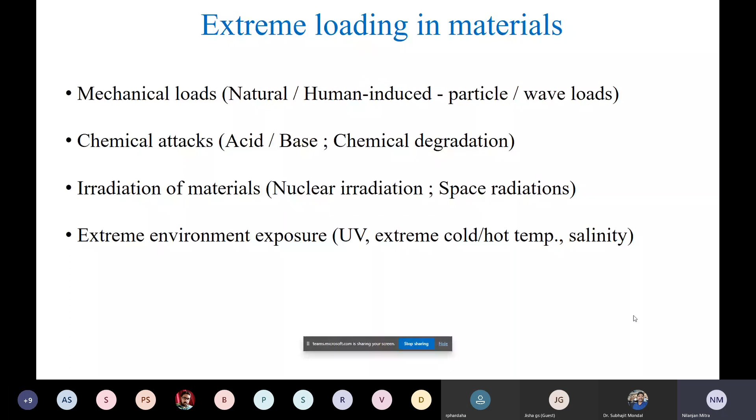What I will go over here is all the different types of loadings I've talked about: what they are and how they can be mitigated. Most of my talk will be around the research that I have performed. Obviously, others have worked on the same topic, but I will focus on what I have performed within this perspective of materials at extremes.

Many of you are aware of this cyclone Amphan. It caused huge amount of damage, not only in Kolkata, but in places like Sundarban and others. One of the main intents of a civil engineer should be to protect these structures against such natural damages. How to do it? One of the ways is to modify the material, make it much more resistant and resilient, such that you can develop these kinds of things.

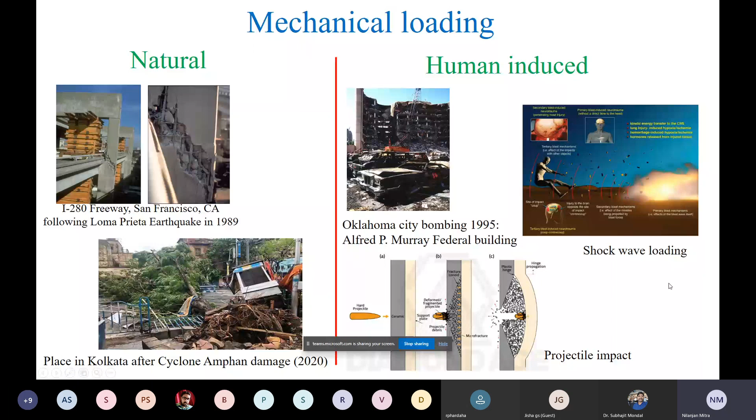So you see how a numerical model is developed and then validated with an experiment. After this validation process, it is then put forward into existing software such that you can model huge buildings and so on and so forth.

By the way, this work is present as an open source type of code. If anyone is interested, you can take a look at that. There is a website by the name of OpenSees, primarily maintained by Berkeley. I was associated with that when I developed a part of this code. But apart from this, there are many other things as well.

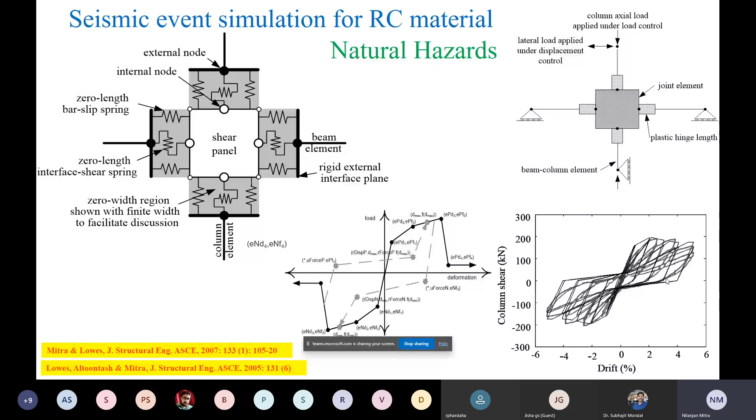Now, talking about man-made type of hazards, one of those hazards is basically the blast wave. Think about how to develop a material such that it will not undergo degradation due to this blast wave.

For that, this is what we took up at IISc. IISc has a big facility for shock tube simulations. So what we did is take different types of materials - normal concrete type materials, and concrete materials with fiber reinforcements and various other modifications.

If you impose 60 bar of pressure on a small cube, like a 100-millimeter cube, you understand what impact it will have. So we took a normal type of concrete material and a modified type of concrete material, and observed the different types of degradation. From there we can suggest that this material performs better compared to conventional concrete materials.

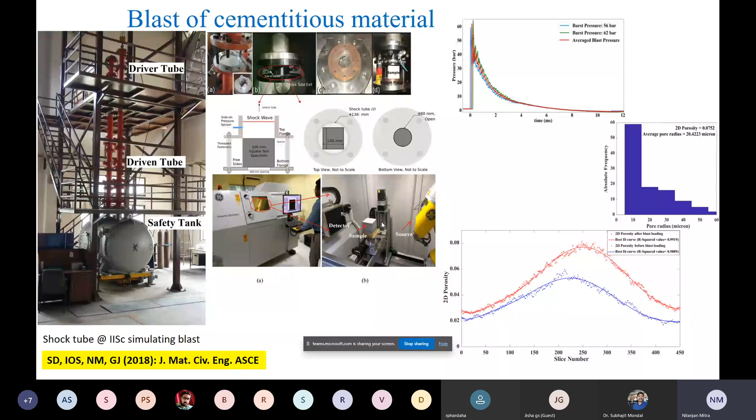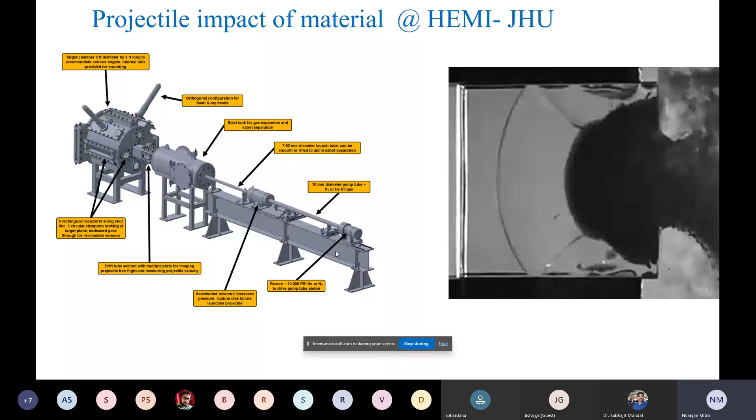Now for the case of projectile impact, here's how things are done. This is actually a picture from the institute where I'm currently at, Johns Hopkins. What you see is a big facility, something in a combination of a shock tube and a gas gun. Why a combination? Because a shock tube just produces a shock, and a gas gun just has a projectile. In this case, it's a combination of both.

In the picture or movie on the right, you see a projectile which enters a target, and as it enters, some waves are getting generated. How the waves are generated, what fragments are created out of it - those things form a part of my research, and not only mine, there are many other persons around the world who do this kind of research.

So in a nutshell, what we are trying to do is break things in order to understand how to make them much better. That's how I would say it.

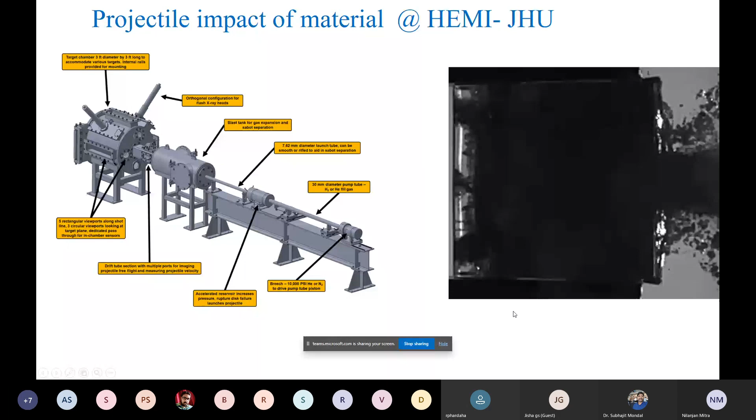Okay, now I think with this, I hope you understood that we need to really work with materials, modifying them to improve their properties, such that they are resistant to different types of conditions which are not part of daily life - I mean these are extreme conditions.

Before we start, I should say, yes, I do perform some kind of experiments, but primarily I'm a computational guy.

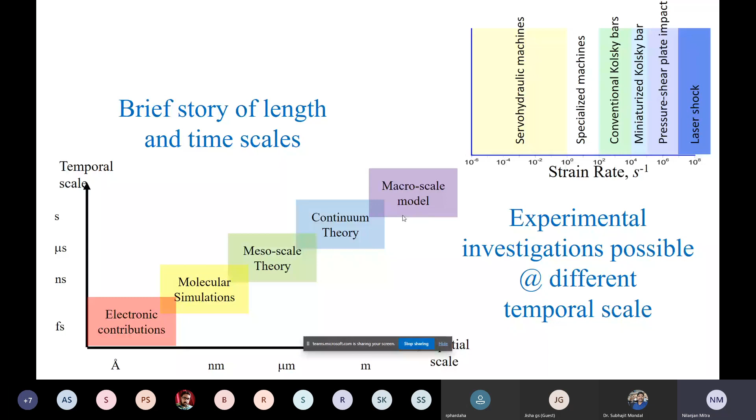So this is just to give you a brief background about what the different length and time scales mean, and what are the different types of experimental investigations that are possible in those different temporal scales.

Now, what we were doing is that if you subject this molecule to some kind of shock loading, then obviously the molecule will degrade after some time, right? So we were trying to find out the point where this molecule will degrade. Eventually, it does degrade. And how does it degrade? Is it the carbon chains which break? Is it the methine chlorine which breaks? So that is what we are trying to figure out.

Now you can say, how does it really matter? Yes, it does matter. Because if you can understand which of the parts will degrade first, you can reinforce that part. If you can reinforce that part, you can make a better material based upon PVC, a slight modification of the PVC, such that when you apply a certain amount of shock loading, the molecule will not undergo degradation. So that is what is important.

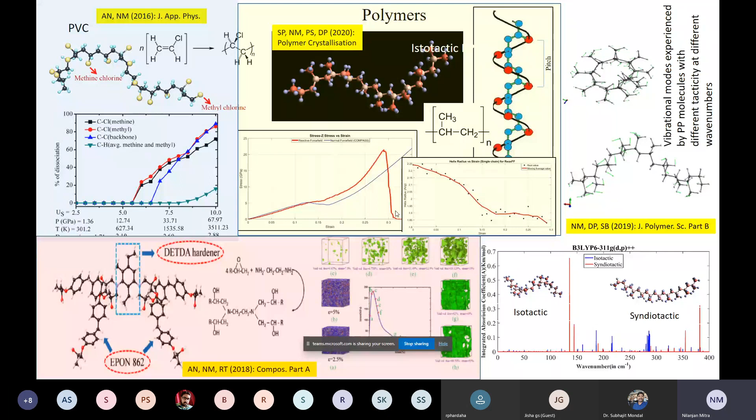Now, apart from polymers, think about something called minerals. Almost all of you, as I understand, are from a civil engineering background, so you must know about different types of minerals, for example your cement constituents. When you have cement, it has different types of constituents in it, like C3A, tricalcium aluminate, C3S, tricalcium silicate, and so on, right? Also gypsum, and there are many of them.

Now, all of these are basically minerals. And as a matter of fact, all of these minerals are naturally available. At some places, you will find those minerals. And these minerals have very interesting characteristics. As you can see, same as the previous slide, I broke up this slide into 3 different parts.

You will see one part at the left-hand side, which is colored yellow. That material is called tricalcium aluminate, C3A, one important constituent of your cement particles. What you're looking at in the top part is how the molecular structure of the C3A is arranged.

Yes, anyone has a question here? I think I heard something. So there is one comment asking you to hide the sharing bar that is showing on your screen. I have to do what? Hide. Repeat again, please. On your screen, yeah. Okay. So can you see now? I just clicked hide. I think so. Yeah, now it's fine. And is there any question? No. So please continue.

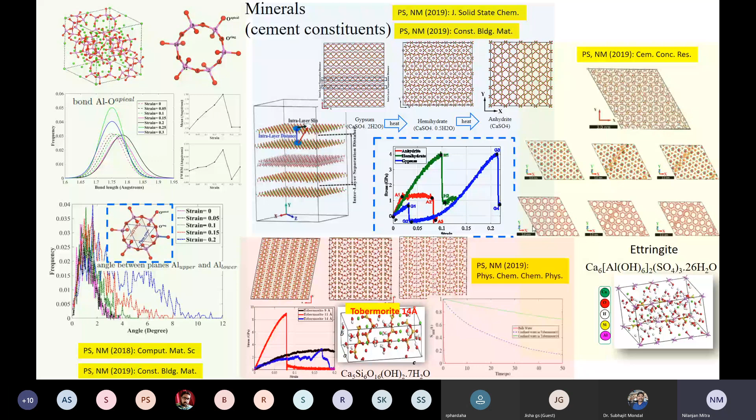Okay, let's move on. Water. I think everyone has seen water. It is also named the elixir of life. But water has very interesting properties. Actually, water is something which keeps us all living. Any planet that we are probing out in space, the first thing we check is whether that planet, star, or whatever it is, has water.

If it has water, then the next question is, is there life? Please remember that. If there is no water, then obviously there is no life. So water does play an important role. It's a very common material. Everyone has seen water, and everybody thinks they understand water in detail, but it's not really true.

Think of it like this. Water has an interesting property at 4 degrees centigrade. And due to that property, when water freezes, it does not freeze from the bottom up. You will see the water has frozen at the top, but inside a pond or a river, the water is still there.

So that means the fishes which are present within it, they're still living. So how is that possible? That's the beauty of water. Another interesting property I will tell you about water.

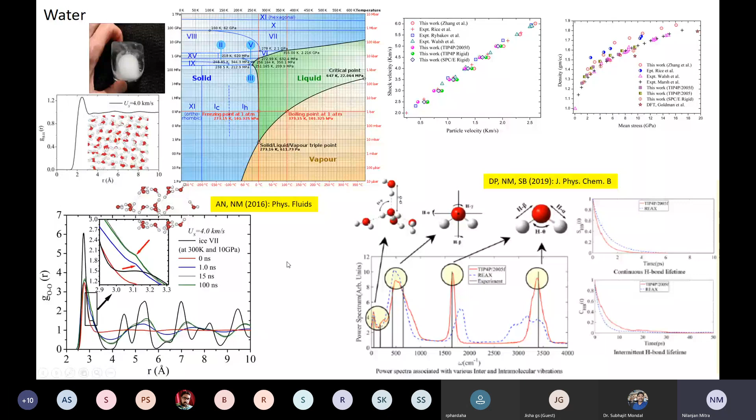So far I've talked about many different things. I've talked about polymers, which are a class of materials exhibiting different types of behavior, usually showing a chain type of structure. Then I've talked about minerals. Most minerals are something like ceramic structures, meaning they have a combination of ionic bonding as well as covalent bonding.

After that, I've talked about water, which is a very common material out there. So those are all complex materials, I should say. If you talk about metals, they're not that complex with regards to molecular structure, because metals do not have a number of different elements within them.

In this case, we are just probing copper. Copper is a very commonly utilized material for shock type simulations or shock type experiments. People always use copper for these kinds of things because copper has certain characteristics.

These are basically metallic structures. In these metallic structures, when you subject them to shock loading, you'll eventually see a lot of different patterns getting formed. These patterns eventually result in some kind of slip along those planes.

You see the small dotted lines, those are basically called dislocation lines. These dislocations eventually give rise to your slip. And this slip eventually accounts for something you might know later on, called plasticity in materials.

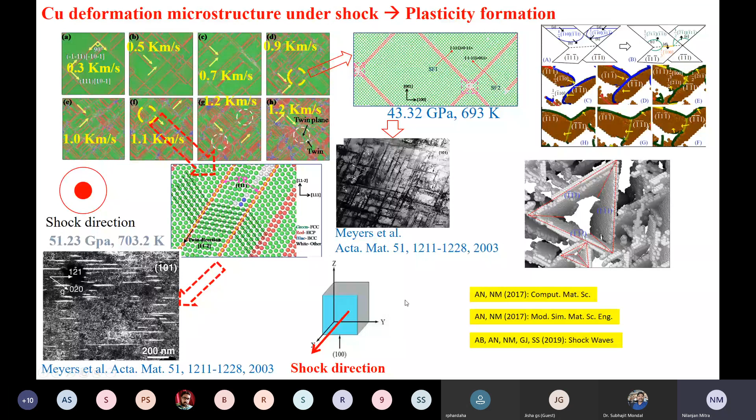Copper not only undergoes plasticity, but also phase transformation. When we talked about examples for phase transformation, we were only talking about moving from solid to liquid stage. But it doesn't always have to mean moving from solid to liquid or liquid to gas. It can also mean the crystal structure moves, and there is a solid to solid phase transformation, from one solid crystal structure to another solid crystal structure.

In this case, what is happening is you have copper, which is basically FCC, face-centered cubic, and under a certain amount of stress or loading conditions, it eventually transforms into something like body-centered tetragonal, or BCT. So we were probing as to how it moves from the FCC stage to the BCT stage.

Now, when you do those kinds of things, you have to do something called X-ray diffraction. XRD is a very common methodology. We've done it numerically, but you can also do it experimentally, and we have validated our work with experimental investigations. When you do XRD, you probe the different types of planes along which light will reflect back. Based on those, you can find out the material exists in this particular orientation, or has a particular space group.

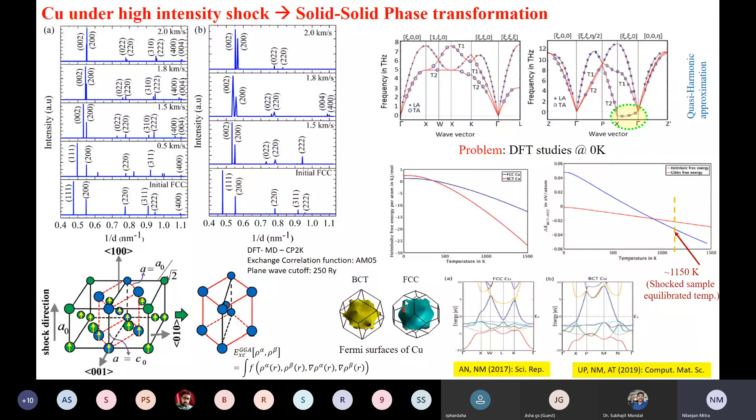If you have any material, it will have some kind of defects - that's a nature for any material. Defects can be of many different types. One of the easiest ways of accounting for defect is putting in voids in the material. You can have connected voids, disconnected voids, and so on. So if you put in a series of voids and subject it to shock loading, what are the different types of things you observe?

As you can see, there are red regions - these are hot zones, where the temperature goes significantly higher. If you can tailor the material by putting in voids and improve its properties, that's a nice thing to do. So we've shown here that putting in a void will change certain shock characteristics. We've done it from the point of view of shock, but it can be done otherwise too. Nowadays, people are putting in simulated voids to change material characteristics, meaning the plasticity behavior of the material, for example. So those things are possible.

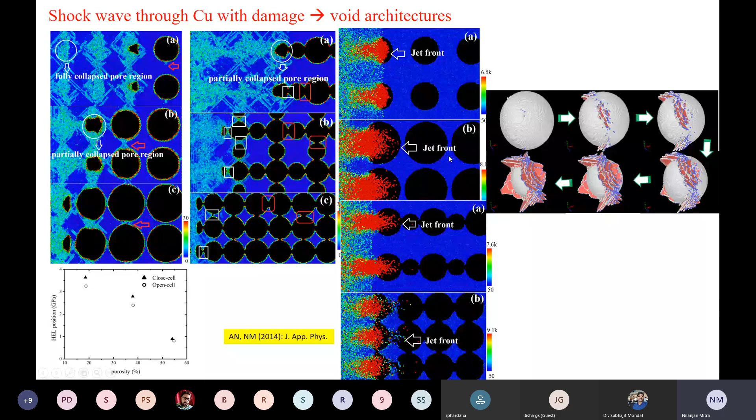When we talk about metals, there are different types, or classes, of metals. One of them is copper, which has a face-centered cubic structure. And then there are other types of metals called HCP - HCP structures are also available.

Hexagonal close packed, it is referred to as. So this hexagonal close packed, if you look into the periodic table, I believe all of you have at least at one point of time looked into the periodic table.

And the periodic table presents very interesting things. Even though I'm a civil engineer, if you're interested in structures or other disciplines like environment or geotech, you also have to think about the chemistry associated with it. So my work has been trying to imbibe chemistry and physics within the concept of engineering. That's what research is all about, I think.

Anyway, if you look into the periodic table, you will see different types of elements, and different elements will have different types of crystal structures. If you look at titanium, you will see that it has something called an HCP structure. HCP means hexagonal close packed.

This HCP structure is kind of interesting, because it does not really give you dislocations, which are essential for formation of plasticity. What HCP structure gives you is something called twins. So twinning is prevalent in HCP type materials.

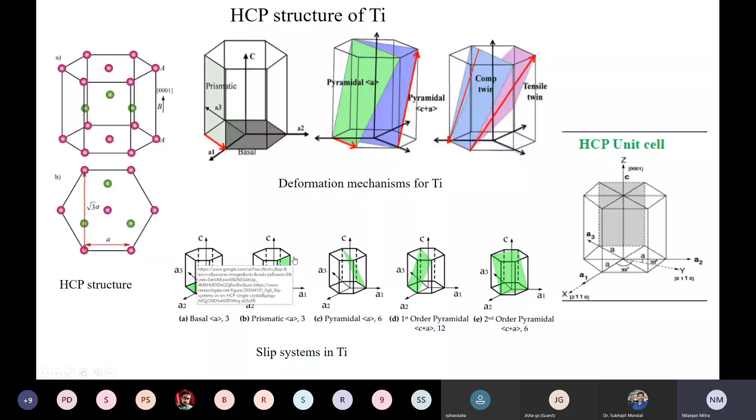So if you subject it to different types of loading conditions, we did compression loading, tensile loading, and so on, you can activate different types of twinning mechanisms. The point of discussing these twinning mechanisms is basically looking into the theory behind plasticity. How do those plasticity mechanisms really evolve, and in which planar directions does plasticity move?

Plasticity eventually means the flow of the material, and the direction it will move is given by your twinnings. As you can see here, if you apply compression loading, you get compressive twins; with tensile loading, you get tensile twins, and many different types of results can come out of these.

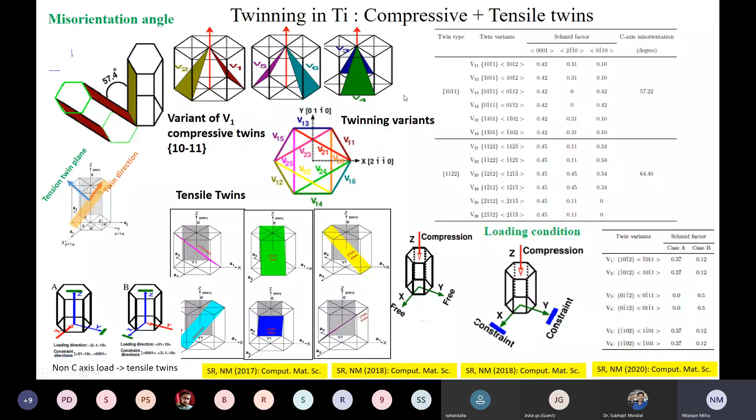Now, just to refresh some of your memory, maybe some of you have seen this. When you talk about bonding in materials, remember we've talked about metals, minerals, and polymers. In all of them, at the end of the day, there is some kind of bonding between the atoms. So when you look into bonding, there are different types available.

You must have read about this back in your class 10 or 12. So you have something called ionic bonding. What does ionic bonding do? It basically takes a valence electron and gives it from one atom to another—the Na atom gives it to the Cl atom, and that's how both of them become stable. So this ionic bonding is quite strong in that regard.

If you think of metallic bonding, it is something like metal ions distributed in a sea of electrons. Everyone shares, and everyone is kind of floating within it. So that's your metallic bonding.

If you look into covalent bonding, it does not give off electrons from one shell to another—they mutually share the electrons. That's what covalent bonding is. An example of that type of material is silicon carbide. An example of ionic bonding is sodium chloride. For metallic bonding, I talked about copper and titanium—those are your metallic bonds.

Apart from that, remember, any material you have will not be purely covalent or purely ionic—it's usually a combination of the two. That's how you must have read about something called Pauling's expression, which gives you the bond ionicity fraction. These things are important to understand, because you're eventually dealing with the material at the molecular or electronic level, and you need to understand when this bond kind of changes.

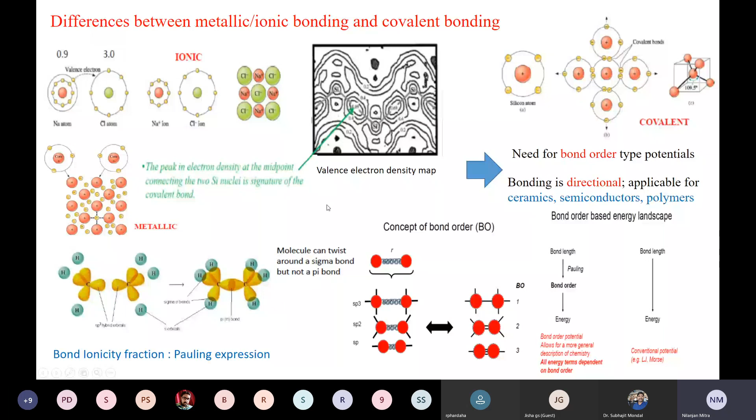So you need to at least understand the different types of bonds present within a material. Now, I've talked about different types of metals - copper, titanium, and so on - but not all materials are metals. Take silicon, for example. Silicon is a very common material used in the semiconductor industry. Any computational device, mobile phone, or electronic item you have contains silicon. Silicon actually forms the basis for the entire electronic industry.

That's why you might have heard of Silicon Valley, which is somewhere in California. Why the name Silicon Valley? Because silicon plays a big role - without silicon, you don't have an electronic material. So you need to understand how silicon behaves under different types of conditions.

Remember, all of these are solids. But even though it's a solid, each structure - like cubic diamond versus orthorhombic, different crystal structures - has different properties. So for any crystal structure, even within the solid form, forget about changing from solid to liquid, the property of that material will change. That's a basic thing for any material.

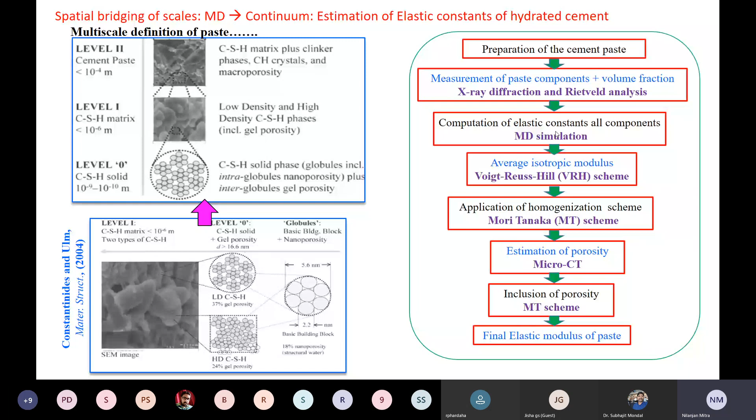What I showed you, C3A, that is basically aluminate. And gypsum I also showed you. I also showed you ettringite, tobermorite, and so on. You see the different types of structures in there. So these are what is present within the powdered cement. As you put in water, eventually you get different types of compounds. And after 28 days, in what we know as hydrated cement paste, we get different compositions. These are different weight percentages.

So we take all these weight percentages and put them in our chart. Then we compute the elastic constants for all of these individual things, and eventually we come up with a value of your elastic constant of something like 30.3 gigapascals. And if you do an ultrasonic test, which is an experimental investigation to find the elastic modulus of any material for that matter, you get something like 28 GPa. So I think we can safely say that the methodology we are prescribing matches quite well with what you obtain from the experiment.

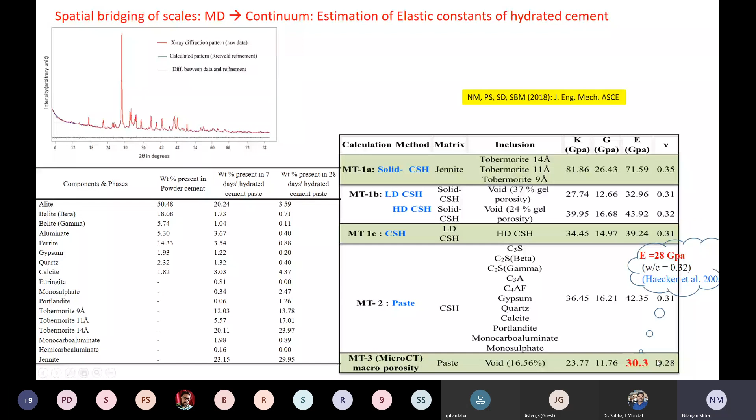Okay, now, as you might have noted, when we talk about these extreme loading conditions, many of these materials are of interest either for defense or for space. I primarily work with the defense region. Space, I have worked once, and I will be working in the future, I believe. But most of them are basically defense types of applications. So there are a lot of different applications.

Some things are copyrighted information, so I cannot show that to you. For example, I also work with different types of explosive materials like RDX, TNT, and so on and so forth. But those things I will not be discussing here. Those are of relevance to any country, right? So obviously that is not an open discussion. So I'll be talking about some materials of interest to defense, which are at least also of interest to any civilian for that matter.

One of those materials is basically a sandwich composite material. We do have a lab setup in which we can manufacture sandwich composites and different types of sandwich composites for that matter. The project that I highlighted in blue was basically funded by the Navy. The Navy was interested in these types of materials which have a PVC foam and glass fiber and epoxy resin. But there can also be other different types of materials which we can do.

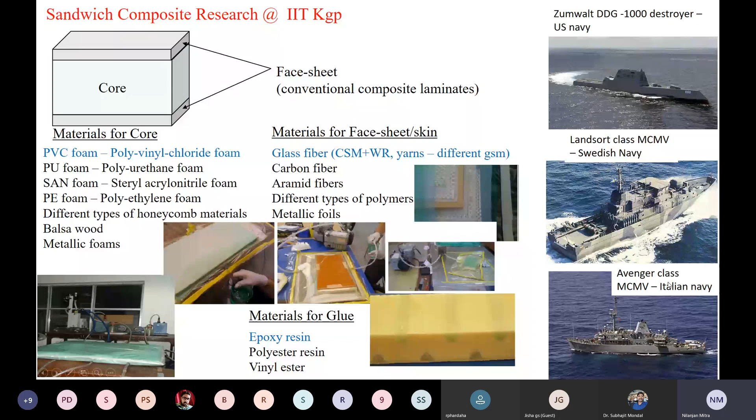So one of the major problems whenever we are talking about sandwich composites is delamination. There are two different materials in there, right? One of them is the face sheet, typically a glass fiber type of material, and the other is a PVC or foam type of material. They have distinctive characteristics, and they are glued together by something like an epoxy resin. So obviously the weak point of the material is the interface region, and that interface region is prone to cracking and delaminating.

So that's quite a common thing. So we devised some methodologies by which we can prevent this delamination. One of them is called a shear key. It is like ridges that you place within the foam, such that even if there is a crack which you initiate, that crack path will get deviated, right? So that's an application of a shear key.

And then also we can do something with carbon nanotubes. If you put carbon nanotubes, then those carbon nanotubes form some kind of chains, and that prevents the crack from forming. So these are two different methodologies, at least what we have worked on. There are obviously other methodologies, one of them being stitching. We have not worked on that. So by these two methodologies, we can prevent delamination.

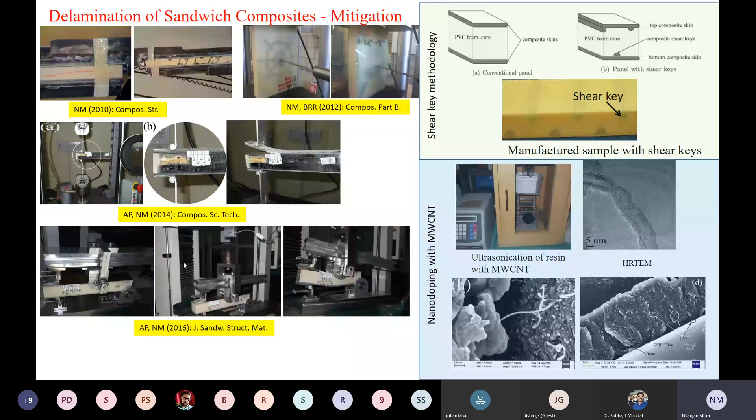And we have done numerous different tests with various different things. We have performed mode 1 type of simulation, mode 1 type of experimental investigation, mixed mode type of simulations in which you can have a fracture propagating under both normal and shear loading, and so on and so forth.

Capturing the delamination is also very interesting, because usually you cannot see the delamination from the face of it, because it is happening inside the material body. So capturing delamination is a very troublesome matter. So what we did in that case is that we put in different types of optical fibers. The diameter of the optical fibers is very small, so these are very small things that you're embedding within it.

And then you're passing light, and as you're applying load to it, there's a change in the frequency of the light that is being transmitted. And with the change in light frequency, you can find out what is the strain that is being developed in the material. So that's what we are doing here.

We developed two different types of methodologies, and actually this was a project funded by the space agency ISRO. This one was primarily meant for sandwich composites for rockets and other things. So how would you find out in situ, while the rocket is going up, for example, whether there is some region which is weak, or there is some kind of delamination?

So for that, we put in these optical fibers, and then we can do real-time monitoring of what is really happening at the interface level between your glass fiber and your PVC, for example.

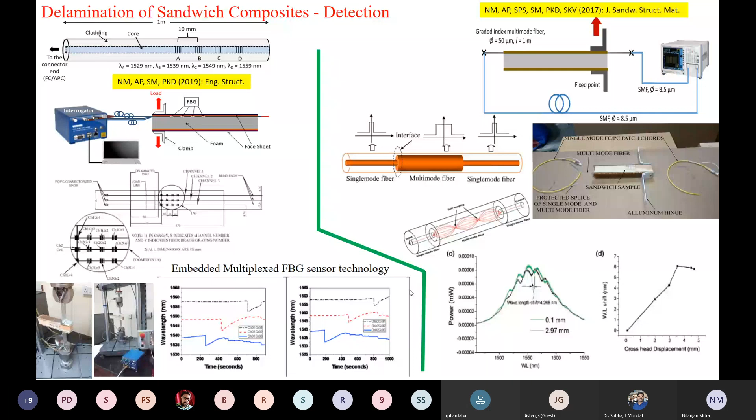Okay. We also carried out some underwater explosion tests. This is at a facility at Visakhapatnam, NSTL, the Naval Science and Technology Laboratory in Visakhapatnam. So we teamed up with them. We made these big sandwich panels, glass fiber and PVC foam. And then we put it underwater, because our application was basically, as I said, Navy, submarine, those kinds of applications.

What we found out is that this material performs much better than steel. Steel is, first of all, much heavier. If the material is heavy in itself, it is not lightweight, and it cannot carry as many passengers, for example, or other equipment, right? So a material which is lightweight is good for the Navy. That is why this material is utilized by the Navy nowadays for naval applications, at least. Okay.

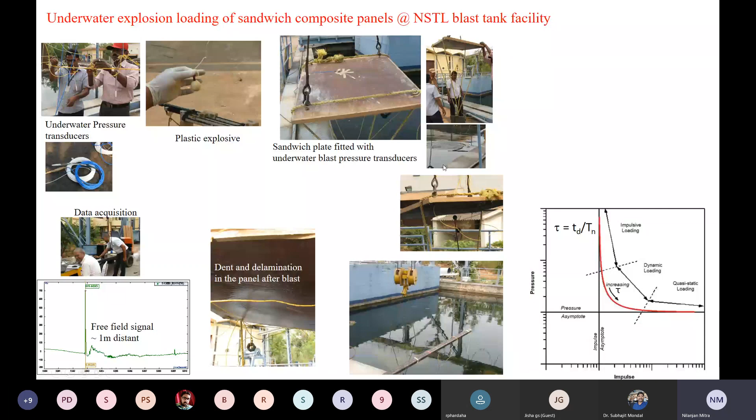Now, I mentioned previously, all of those cases that I've described so far are primarily related to mechanical types of situations, meaning that we apply some kind of mechanical loading, whether it be a projectile impact, a blast or a shockwave type of situation, or some kind of natural hazard like an earthquake and so on. And what happens to the material? How can you change the material and so on? But

extreme conditions, when I'm talking about extreme, it is not always only the loading component of it. Your material may be subjected to some extreme weather conditions, an extreme environment. Think about a ship. You might have seen a beautiful view of ships that are nice and clear, but there are different types of sea states. Maybe after this you can type in something called sea state 5 on YouTube, and you can see what that condition means. You'll understand that there are different types of sea states to which your marine structures are subjected.

So obviously, when you're putting up a ship, it has to withstand different types of marine conditions, and one of the extreme conditions is sea state 5. If you look into it, you will see the amount of waves and so on. Apart from that, these ships also operate under extreme conditions. For example, if you have a ship stationed in Alaska for 2 or 3 months, the temperature in Alaska is usually around -20 degrees centigrade almost all throughout the year, apart from 1 or 2 months in which it goes above 0.

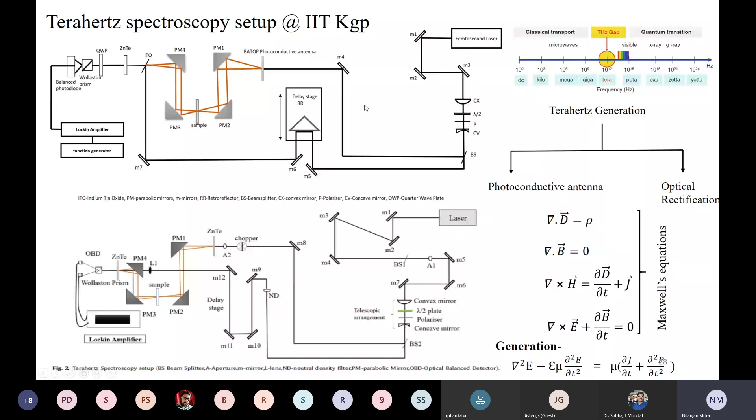By the way, we have a terahertz spectroscopy setup. I will not deal with that in detail, because we set it up ourselves. This is not something you get in the commercial market; you have to set it up yourself. So we have that, and there is obviously a lot of physics associated with it. We did it in collaboration with one of our physics department professors. I'll show you what I talked about earlier, IR spectroscopy and terahertz spectroscopy.

IR is something which probes the vibration of the bond. Like if you have a CH bond, you are probing the vibration of that bond. In the case of terahertz spectroscopy, you generally do not probe the vibration of the bond, you probe the vibration of the entire molecule. So there is a distinction between terahertz spectroscopy and IR spectroscopy.

We are doing something like a simulation at the electronic level in order to do these simulations. And when you're doing the experiments, you are basically doing terahertz spectroscopy.

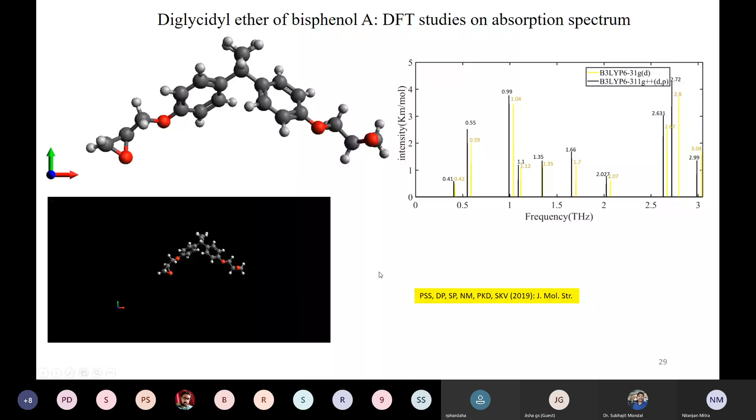I have talked about many different things, primarily for the material, not much for the structure, apart from the fact that once I described the beam column joint.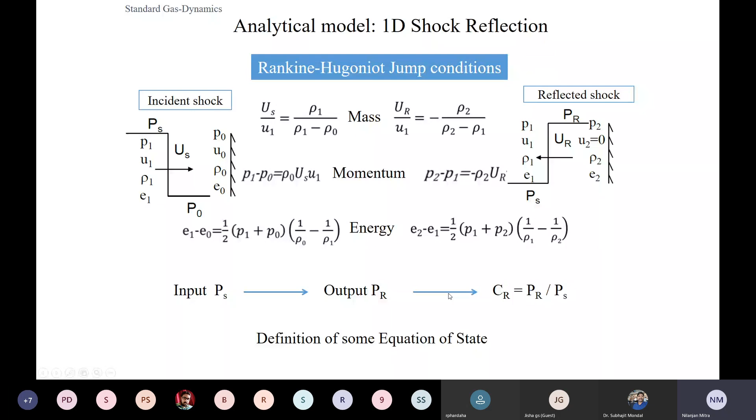The interesting thing is, the question we were probing here is, forget about the equations as I said. There are a lot of equations, and if you're really interested in the topic, you can go to the equations and understand in much more detail. But the outline of it is something like this.

Let's say you have a shock wave passing through the air. You must have read about the ideal gas equation of state - from class 10 to 12 you'll remember PV is equal to nRT. That's the basic equation for an ideal gas. What it does is relate the pressure, the volume, and the temperature by some equation. So PV equals nRT - when you use that, you are relating the pressure, volume, and temperature.

Together, you bring the three things together - that's your equation of state. So what you're meaning by that is, you change the volume or you change the temperature, you get some different pressure. Either one of the two you change, you get the variation in the two different things. So that's a relationship you build along with that.

Now, you must also note this ideal gas equation of state is not something which is applicable under all conditions. Like, let's say if I'm talking about shock waves and other things, we talk about huge amounts of pressures and huge amounts of temperatures. In those cases, your ideal gas equation of state is not actually valid.

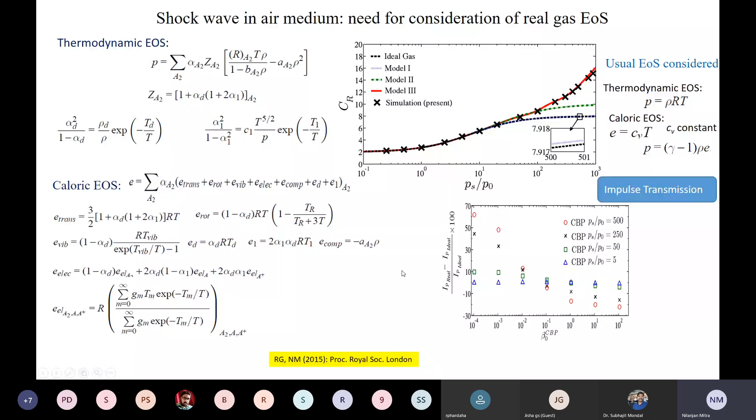We did it for the air, and also we did it for water, because water is the concern, at least in our naval area. In the case of water, it's much more complicated - you just do not have just a shock wave which is hitting the structure.

There are a lot of things, a lot of physics involved in an underwater explosion process compared to an air explosion process. Underwater explosion involves not only shock wave, but also cavitation bubble dynamics. We mainly concentrate on the shock wave part. Cavitation bubble dynamics is what we are doing with one of my previous students. We have proposed a work and are working towards cavitation bubble dynamics, but the work already completed is basically on shock waves, as to how the shock waves pass through air. Air we have already demonstrated. Water is what we're showing here.

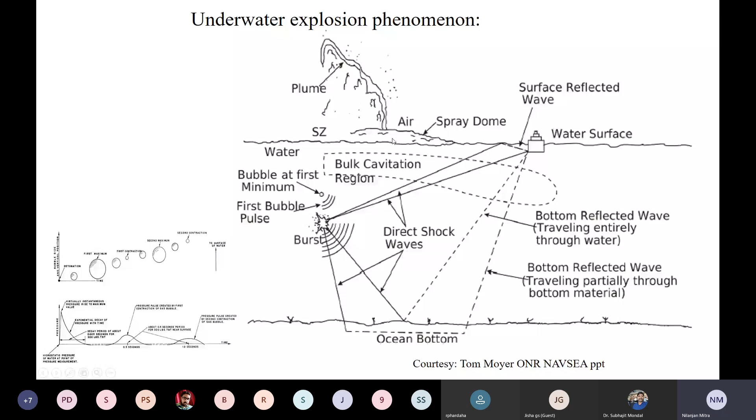Okay, so we have a lot of different things. As with air, we are showing how the CR value changes along with different pressures. We have also shown that if you have a rigid surface, how that surface is going to behave, or how there is a fluid structure interaction which happens. If you think of the water and the structure, which is basically something like a rigid structure, you can also think of that as a deformable structure, with different ways in that structure.

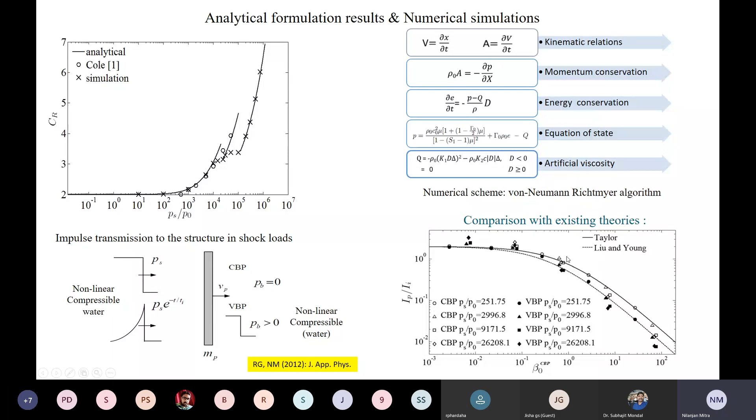As you might have seen, we talked about sandwich composite, because that is the type of material we use for our naval scenario. Those materials will have some kind of voids, and when you put pressure on them, those voids will compress, and that will influence the structure behavior. So that's what we were looking into. Along with that, we are bringing in this core compression model. The core will compress, and if it compresses, then what happens? That's what we are bringing in.

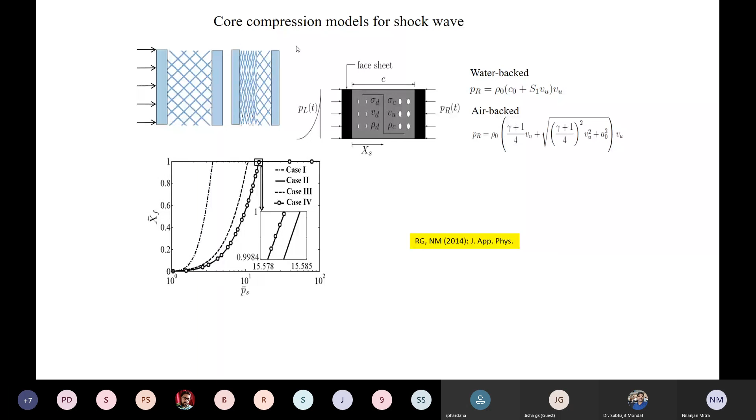The shock wave on the structure may not be entirely a normal shock wave. Normal shock wave means the incidence is at 90 degrees to the structure. It may not be like that; it may be at an inclined angle. So what happens if you have an inclined angle? We were doing this with different types of shock polars, also referred to as shock polars.

We were seeing how the shock polars change in the case of water. This is actually a new work from us; there is no prior work on shock polars in the underwater situation. There's a lot of work on shock polars in the air domain, but not underwater. In the air domain, they're interested because, for example, many defense planes exceed Mach 1, the speed of sound, and in those cases you get a sonic boom. People have done a lot of study on that, but underwater there is no study. So we were one of the first to do this kind of study for shock polars underwater.

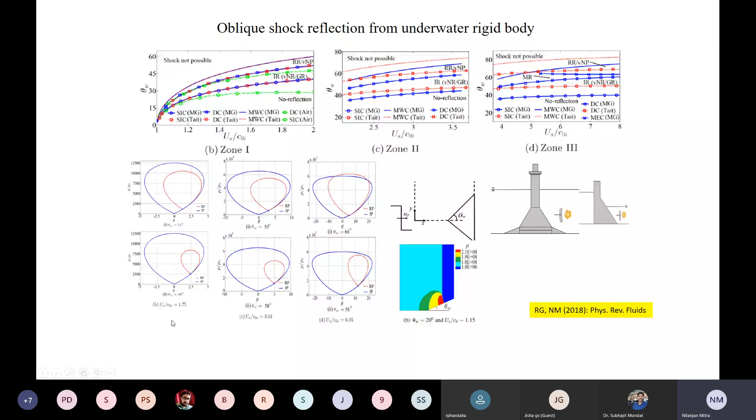I should nearly complete this now. All of these works you've seen are done by my students, mostly my PhD students, some of whom have already graduated and moved on in their lives. I have a few more PhD students at Kharagpur. All the agencies that funded this research are various agencies within India and also some in the USA. Right now I'm working with Office of Naval Research type work in the USA. So I do these kinds of things typically for materials at extremes.

Now, for a final slide, when you deal with shock waves and other things, it's a never-ending research domain. Shock waves have applications in many different areas. I was talking about aerospace and hypersonics, space vehicle entry or exit from the atmosphere, and planes moving at more than Mach 1 type speeds.

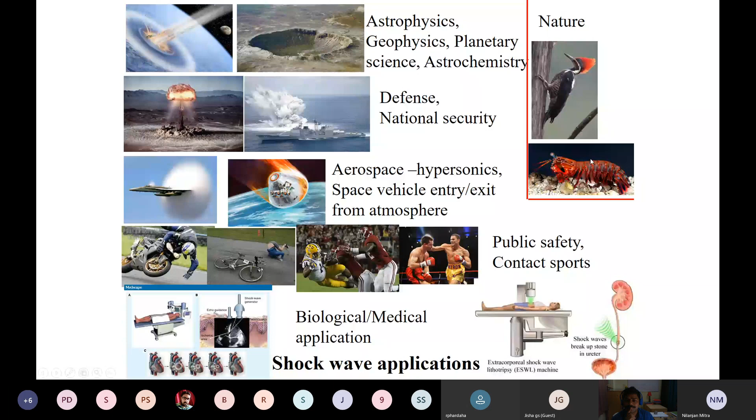There is also the mantis shrimp. The shrimp also is very interesting. It can give you a shock. I do not know if you have seen a mantis shrimp, or tried to put a hand in water which has a mantis shrimp and felt the shock of it. You will understand what I'm talking about. Search on the internet, YouTube, for mantis shrimp, and you will see what it means.

So I would like to end by saying that any problem that you look into, you have to understand what you're trying to probe. What is the question that you're trying to answer? I've shown you a very plain structure of a beam column joint. If I were to think about it from a continuum perspective and give an understanding to a design engineer of how he should build his structure, I'll be doing some kind of continuum simulations.

If I want to take a little bit deeper look and think about the material, then yes, I can propose some kind of material which will be resistant to these kinds of things, like maybe fiber reinforced concrete. If I want to think about which fiber is better compared to the other one, then I have to look at a much lower scale, at a molecular level. So it depends which problem you're trying to address. That's what is important.

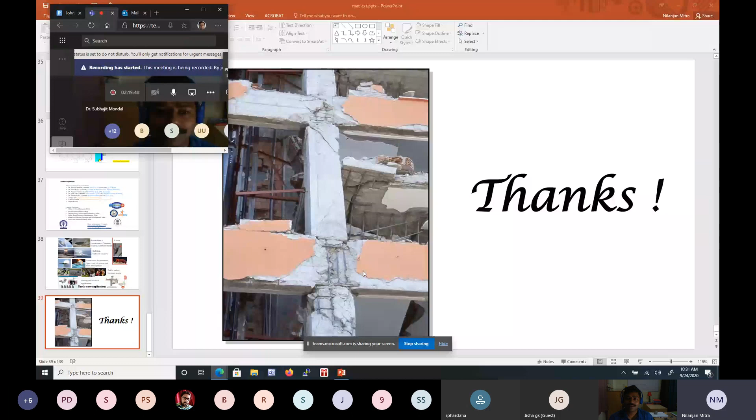Yes, I can see. The last question, from Jitu Panda: what is the relation between column and beam on the design side? It is a little bit offbeat from today's topic. I actually did not understand your question, frankly speaking. Why don't you tell me a little bit more about what you mean by column and beam on the design side? Jitu, can you unmute yourself and ask the question? You can type it here or you can unmute yourself and ask.

Okay. Sir, I want to ask on behalf of the participants. Suppose any of these participants want to carry out the type of research you are carrying out in India, then where can they get this type of facility in India, and how can they approach there? IISc Bangalore or some naval board, or where can they get this type of facility?

Okay, with regards to experimental facilities, the shock tube facility is present in IISc, and from IISc it has actually moved on. IISc is actually one of the forefathers of shock studies, and after that it has moved to different IITs as well. IIT Bombay Mechanical Engineering has one shock tube. We also at IIT Kharagpur have one in the civil engineering department.